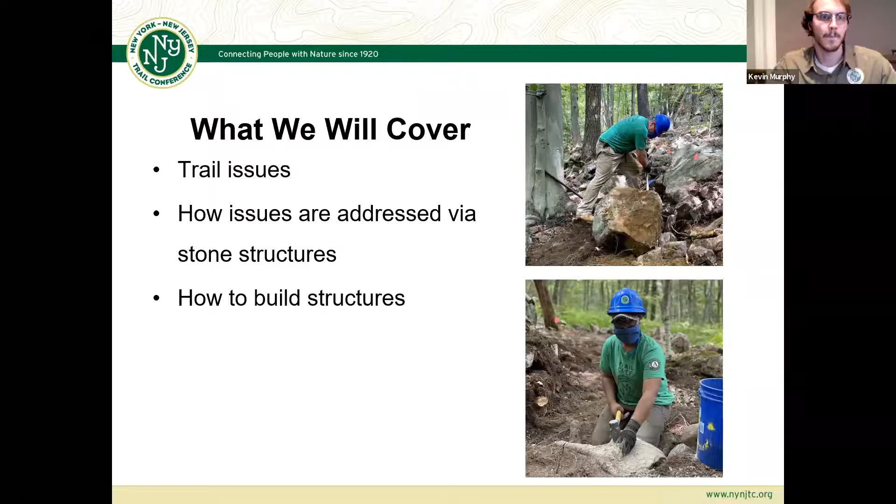So let's take a look—oh sorry, no. By a raise of hands, is everyone pretty familiar with the Trail Conference? We're all familiar with the history. I know I heard that some people are longtime volunteers here.

If you're not familiar, we were founded in 1920. It's almost our 100th birthday on the 19th. We're a volunteer-powered organization that currently maintains about 2,000 miles of trails. And here is where we work, our headquarters, the Darlington Schoolhouse in Mahwah, New Jersey.

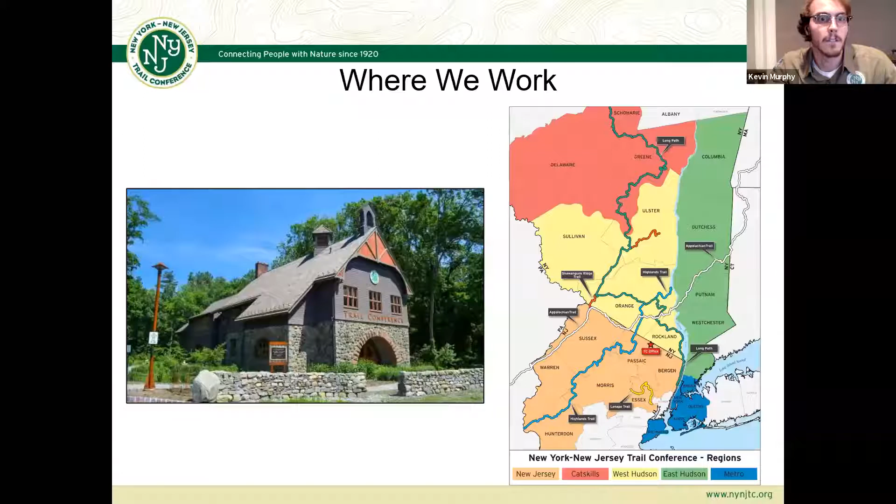Now let's take an overview of trail building and what the end goal is when laying out a trail. Trails should rely on the minimum trail building required to make the user's experience safe, navigable, and sustainable. However, even the best designed and maintained trails can suffer from issues requiring intervention, including the building of stone structures.

But first, let's look at these trail problems, these issues that we encounter. One is steep trail grades or steep slopes, which will accelerate erosion and make your trail unsustainable. Water management is a major issue—you have to accommodate for drainage and keep water off the trail and at the right speed.

Soft or unstable tread needs to be hardened. An example of soft tread would be muddy or wet areas. Unstable tread could be soil that needs to be retained.

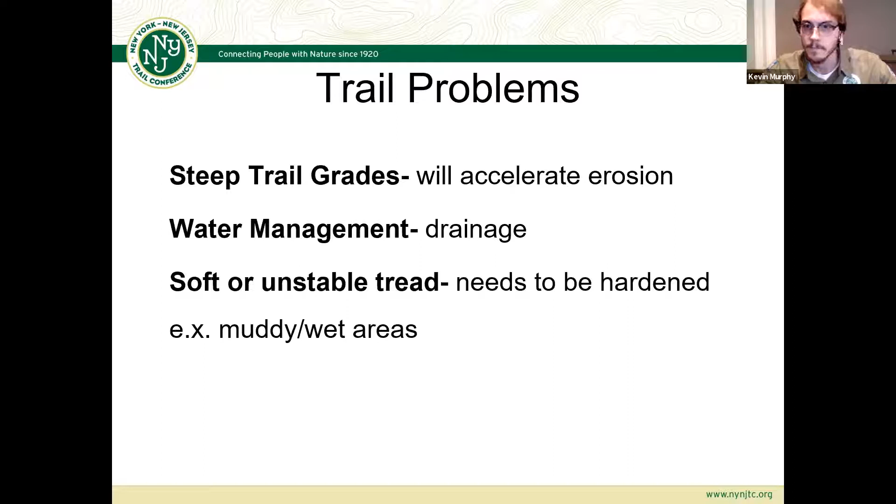So what can we do about these issues? There are really two options. We can either choose to reroute the trail to a different section of the land where we don't encounter these issues, or if rerouting is not an option, we can choose to regrade the tread. We can build drainage structures, sculpt the land somehow, and or address them through building structures, which we're going to look into today.

These trail problems we discussed can be solved with timber or wooden structures, but stone has advantages over timber, namely the cost of materials. Also, timber needs to be packed out to your site, which is time and energy consuming. And the lifespan of timber is not as great as stone, even if you're using rot-resistant woods like black locust or treated woods. It's not going to last as long as stone.

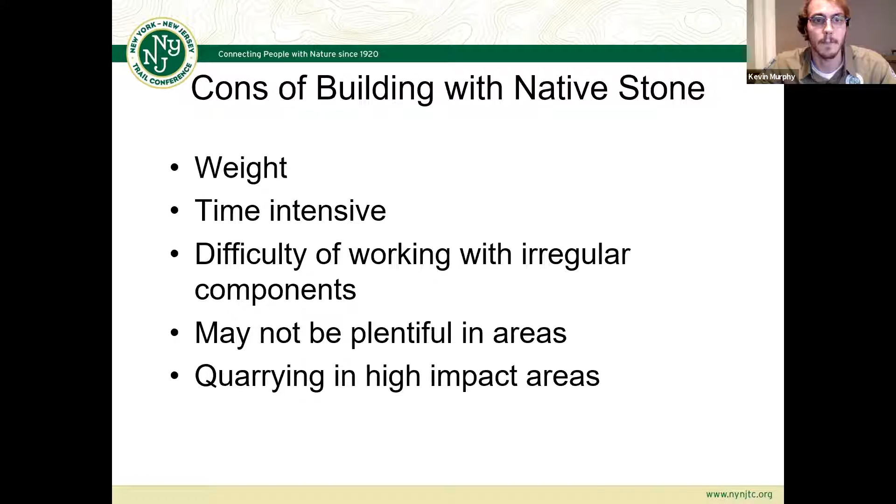So I'll let John now go into stone staircases. Yes, thank you. One of our most commonly used tread hardening structures is the stone staircase. Many of the trails that we work on traverse steep slopes, and that is why we choose to build staircases in these cases.

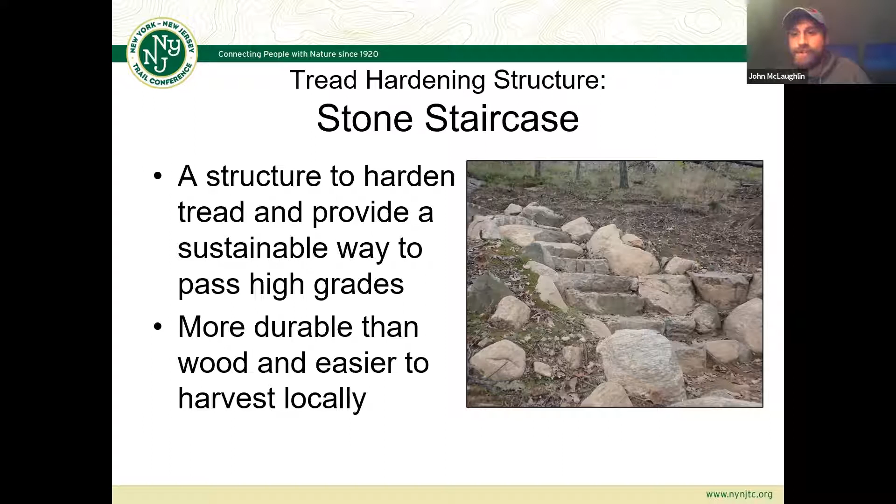Okay, so here's some of the different components of a staircase. I'd like to think there are four different components, one not shown here. So the first is step, the next is the base step, another is the gargoyle, and the last is crush. With the step: it should be about 6 to 8 inches tall, 11 to 18 inches long, and 18 inches or greater in width.

The base step is the first step that is placed and is covered by a few inches of mineral soil. The gargoyles are large rocks that are partially buried along the perimeter of the staircase. They help stabilize the structure and deter users from walking around the staircase. And lastly, the crush and fill are essentially rocks we have manually crushed, and they can be used as a base for all these components, or to fill in gaps between each different component.

I just want to add that the base step is there because it helps the structure keep its integrity, because when people go down the stairs, they usually put their full weight right as they come off. So the base step is there so that all that weight being applied, that compaction, is accounted for.

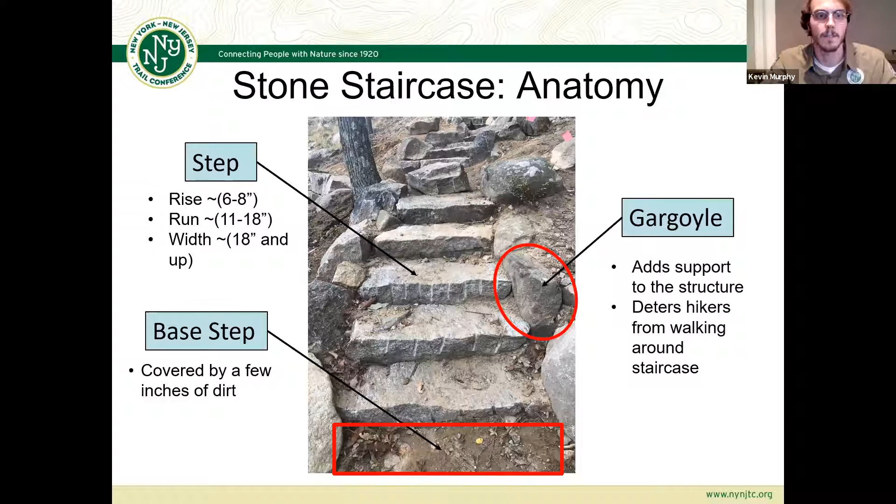Okay, so the staircase runway is another component of the staircase. It is a flat or slightly sloped patch of tread between steps. It's used as a break for hikers, or it's also used if the staircase is too steep for the slope. Gargoyles are also still required for this structure, as you can see in this image here.

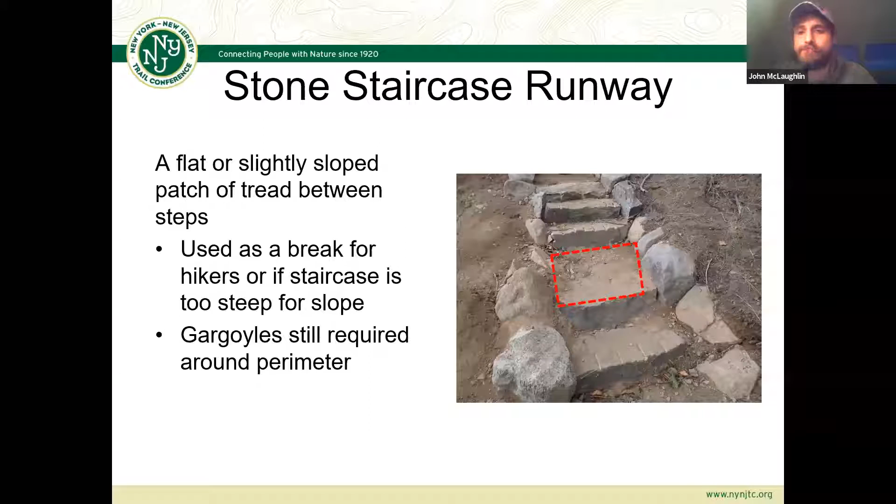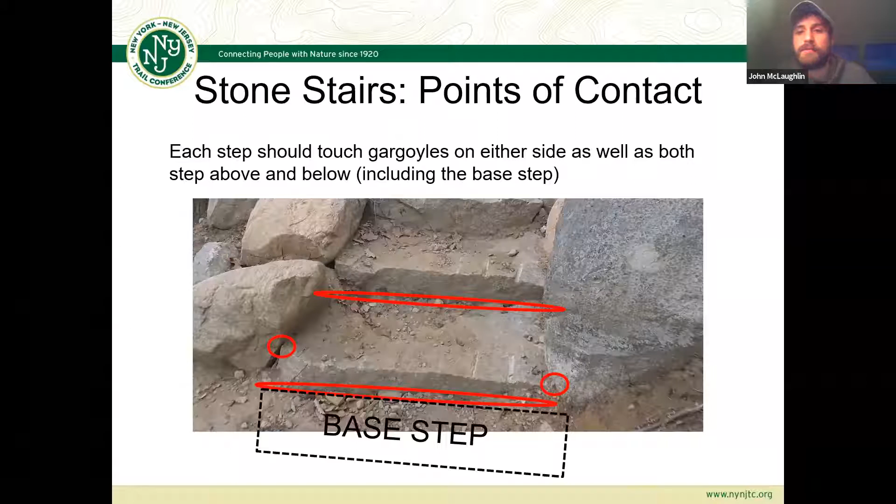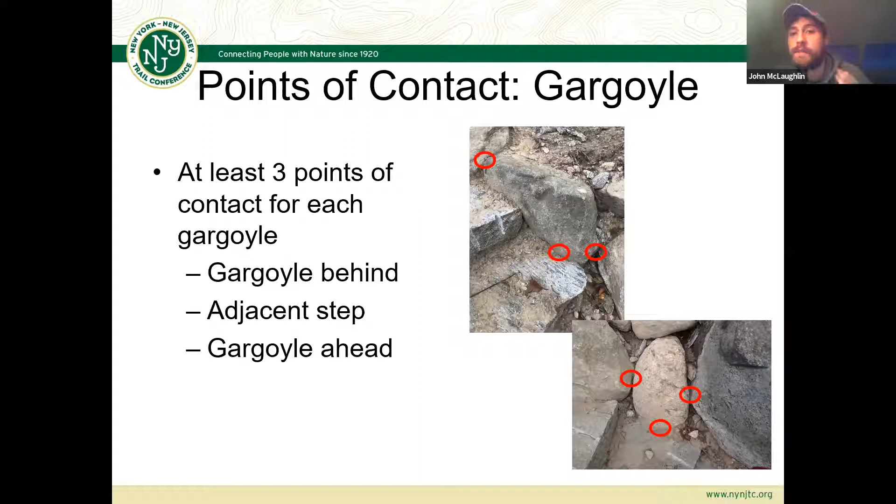Some important points of contact in terms of the gargoyle: at least 3 points of contact for each gargoyle, including the gargoyle behind it, the one ahead of it, and its adjacent step. In some cases, like the top left image, the gargoyle encompasses almost 2 steps, or even more, and it must have contact points with each step it encompasses.

Now that we've learned about the different components and anatomy of a stone staircase, let's look at how you actually plan a staircase out.

What you want to do is measure the elevation or rise over your distance. This tells you how many rocks you need to go X inches in distance and rise Y inches. I'll show you a diagram and the method using a 4-foot level and a measuring tape.

Here's a hand-drawn diagram I made. I used a 50-inch level because that's what we use in the field, but a 4-foot one is more common, and you can do it the same way. Start at the top of your slope, take your level, and measure the segments of rise and run for each part of the slope until you reach a flat part. For example, you might go 150 inches in distance and rise up 57 inches. Knowing that, and as John explained, we want a height of 6 to 8 inches on each step, which helps you break down how many rocks you need to go up 57 and over 150.

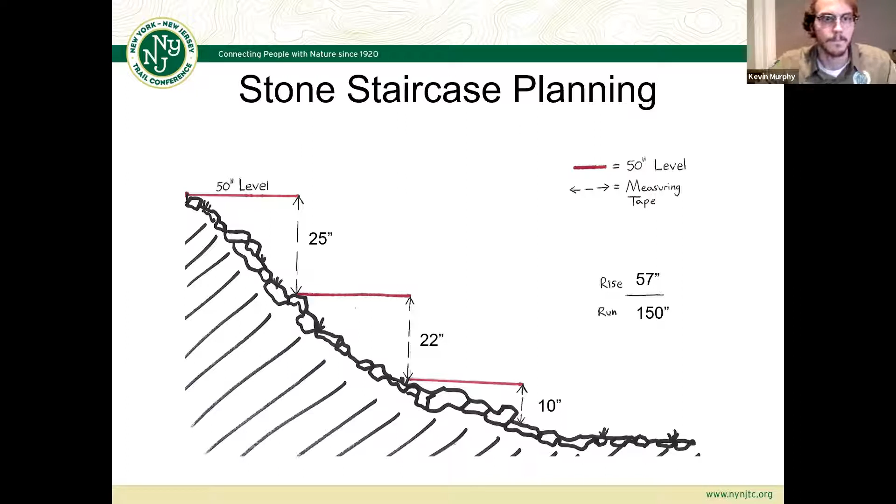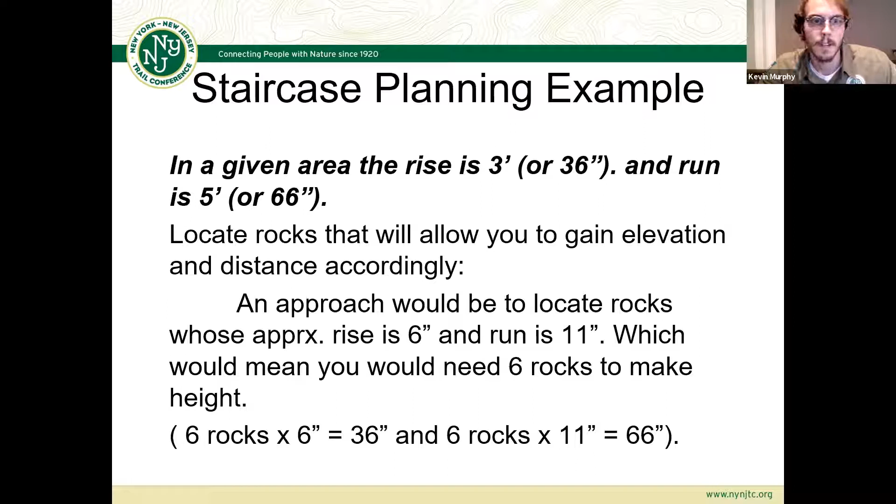Let's look at another example. In a given area, the rise is 3 feet and the run is 66 inches. We want to locate rocks that allow you to gain elevation and distance accordingly. You could locate rocks whose approximate rise is 6 inches and run is 11 inches, which would mean you only need 6 rocks to make height. That's a way you can break up how you plan your stairs and what approximate dimensions you're looking for.

I think my partner had to log out because he was having an echo issue. Let me see if I can admit him. You there, John? Give him a minute. Yeah, John? Okay, I will cover his slides. Let me make sure he's... I'm back, can you hear me? Yeah, I can hear you. Sorry, there was an echo, so that's why I tried to log back in. I'm not sure if it's gotten any better. Maybe not, I'll continue, I can hear you okay.

So, stepping stones. This is another tread hardening structure that provides a surface to traverse seasonally wet or muddy areas.

Hey John, I think you're still echoing. Okay, you want to just cover these slides? You could maybe try to turn down the volume on your speakers or something. Okay, I'll cover this slide right here.

Stepping stones are a structure used to harden the tread, providing a sturdy surface for people to traverse seasonally wet or muddy areas. Stones are arranged so that their flat faces are facing up, with about 8 inches left between stones. The stones are buried in organic soil so only a few inches are exposed on top.

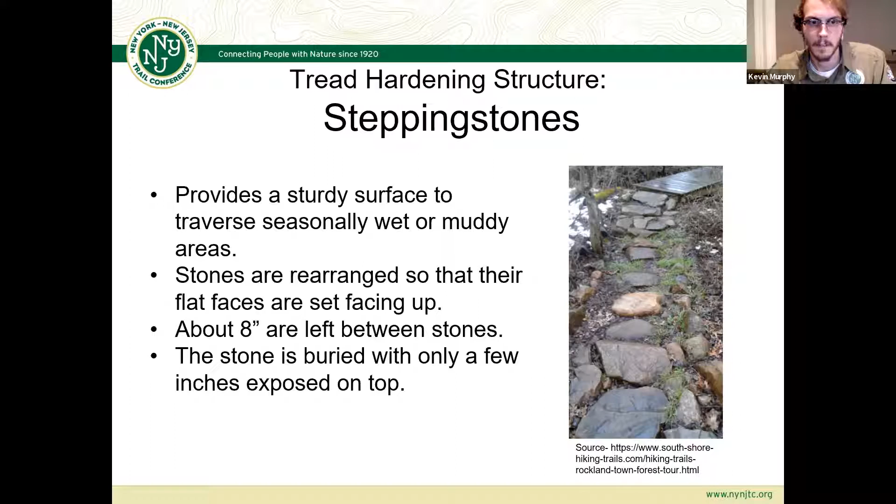You want to try this, John? I think he went out and is trying one more time to come back in. Okay, I'll do this one.

This is a structure used to construct tread called the stone turnpike. Its purpose is to slightly elevate portions of the tread over wet areas. You use it in areas with sitting water, and the benefits are that it makes the best path for hikers and sustains areas of conservation concern. It also works well for multi-use trails that have livestock and mountain bikers that can't step on individual stepping stones.

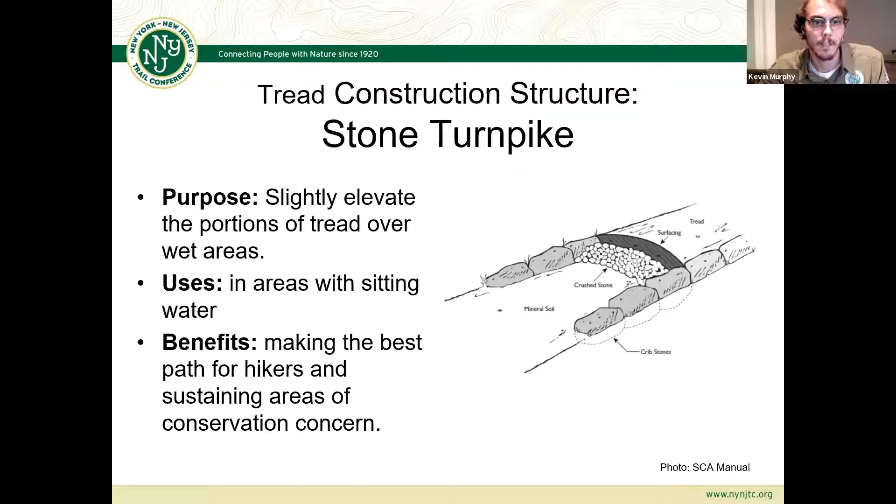Okay, you want me to try this now, Kevin? Is it echoing? I don't hear you echoing, but other people might. I'll try this.

So, the stone turnpike execution: rocks are arranged in 2 rows, marking the perimeter of the turnpike. Crushed rocks fill the space between the rows, and then this is all topped and packed with mineral soil.

Okay, so one of the drainage techniques that we use is a water bar. I will say as a disclaimer that water bars are not used as much as they used to be. Kevin will cover another technique after I'm finished with this called the culvert, and that's more commonly used today. But anyways, the water bar is used for a variety of drainage issues, to improve existing drainage patterns, divert snow melt and seepage, and rain from tread.

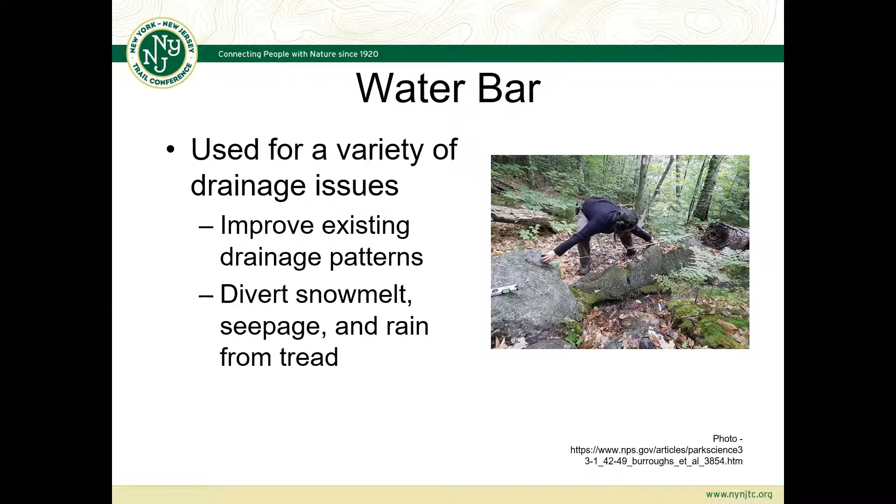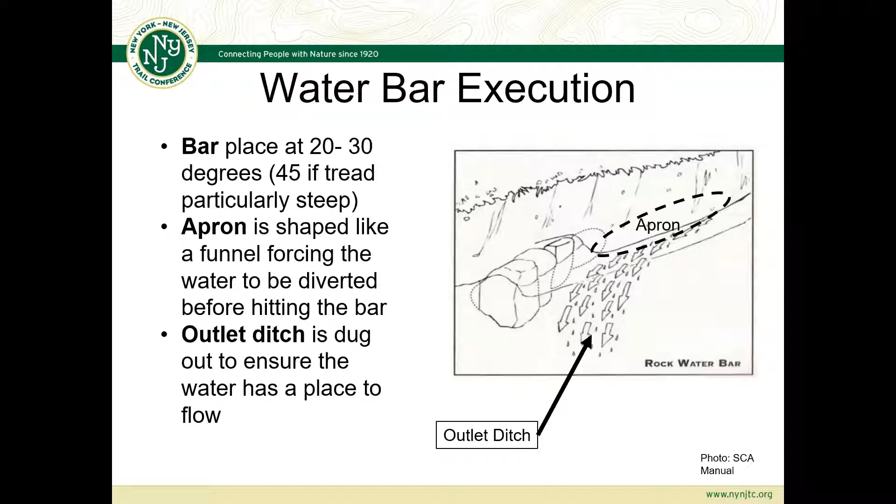So the execution of making a water bar, it can be made using either wood or rock, but rock is obviously preferred because of its durability. The bar is placed at a 20 to 30 degree angle on the trail, with an apron shaped like a funnel, forcing the water to be diverted before hitting the bar. And the outlet ditch is dug out to ensure the water has a place to flow.

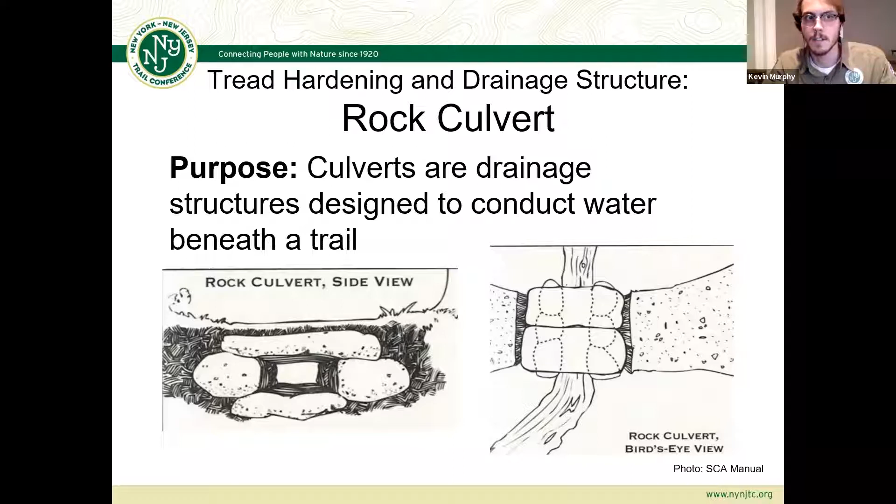Okay, so now I'm going to talk about a rock culvert. It's used to harden tread, and as a drainage structure it's kind of a multi-solution structure. Some people might be familiar with pipe culvert, you might see that in road construction, where there's a pipe underneath a road that allows water to go through. So a rock culvert is similar. They're drainage structures designed to conduct water beneath a trail.

Let's look at how to construct one now. First you want to dig out your area, excavate wherever you're going to be putting your culvert, and lay large flat stones in a trench to start the floor. On the sides, install large, well-matched stones, and you want to have them wide enough so you can get maybe a shovel spade in there, so maintainers can clear out debris, because that could cause your structure to fail, your drainage to get clogged.

And then to complete a culvert, you span the side rocks with a large flat stone, placed securely enough on top to withstand use. Remember that people walk over this. This is made to be an aesthetically pleasing drainage structure, so people can just walk over, they don't have to step over a water bar or something. And you can top it with soil or other earthen material to help keep it more structural.

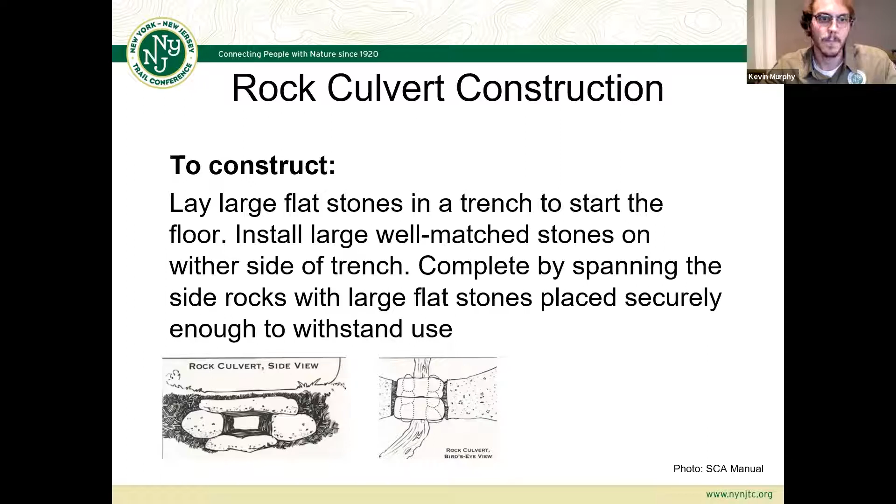Okay, so now let's talk about crib and retaining walls, which I mentioned before has been my specialty this season. Crib or retaining walls, you can use that word interchangeably, but they are a great problem solver. You can use crib walls to build up on steep slopes to create a new level trail surface behind them, or they can be built to retain a steep back slope just behind or above the trail from eroding onto the trail surface.

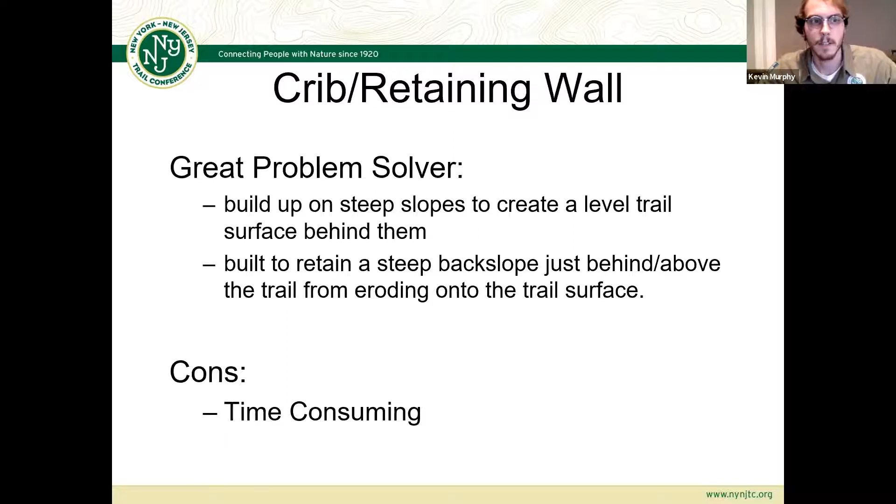However, they solve a lot of problems, but they're very time consuming. We try to mostly design a trail so that we don't have to build walls, because they take a lot of time and energy.

So most rock walls built on trails are dry walls. An advantage of drywall construction is that crews won't have to pack out cement and water to the site, but without mortar, gravity becomes the glue. So each stage of the drywall construction, from selecting large rocks to placing them with care, enhances the effectiveness of gravity and increases the sturdiness of the wall.

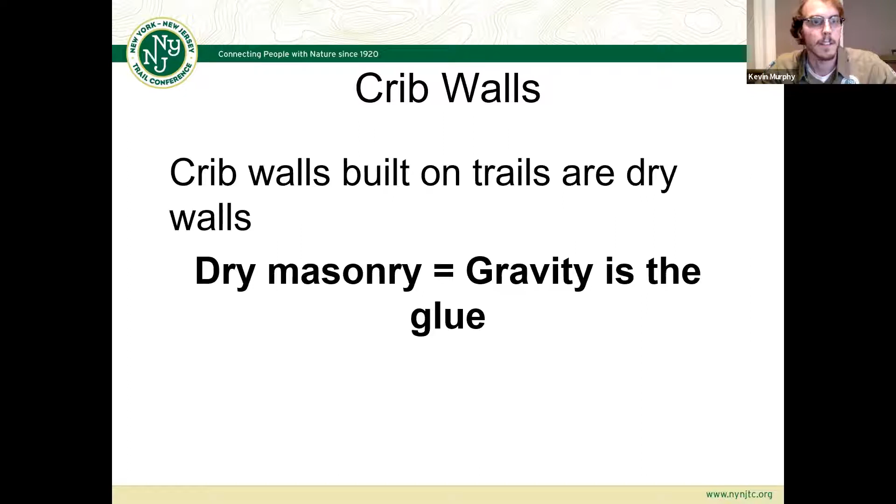It's preferred if you can get away with just using a single tier of large rocks, because if you get into multi-tiers, you have to worry about insloping your rocks, battering, and breaking joints, which we'll learn about. Also note that if your wall is 5 feet and up, that requires engineering.

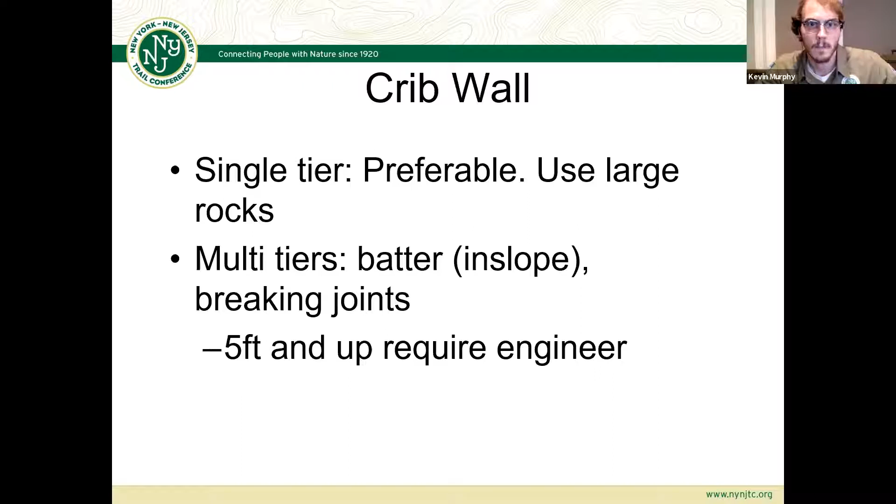So the first step of a multi-tier crib wall is to inslope your foundation, or this is known as battering your wall. First, you're going to excavate your batter, so dig down in the earth, and there's different ratios of how much you can lean if you really want to dive more into this. But basically, the main point with base tiers is using large rocks.

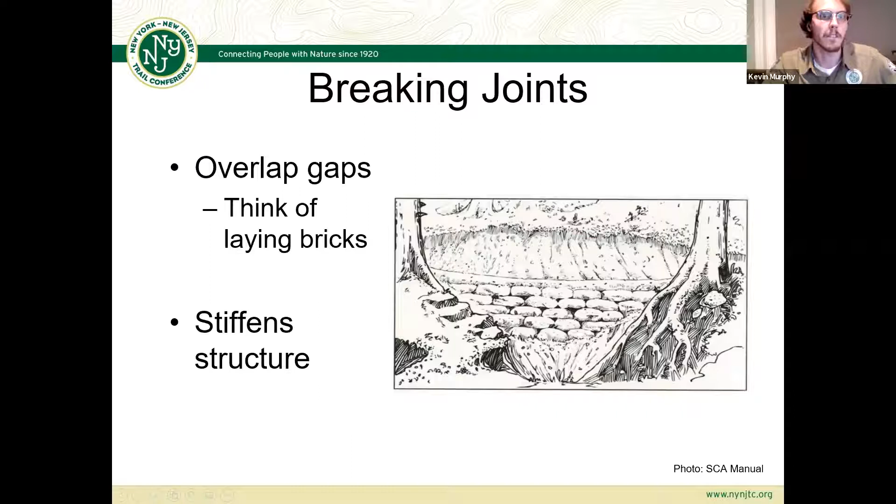So let's talk about breaking joints now. Breaking joints is the process of, let me go back, breaking these gaps. You can think of it like laying bricks, and here's a photo from the SCA manual that's very brick-like. You can see the joints, the gaps right here are broken by this rock, and vice versa. Breaking joints is going to stiffen your structure. Here's another example of a wall we built at Sterling.

And the last part of a crib wall: you got your base tier, you got all your middle stuff, and now you need your capstones. You want them to be very large because all that weight is going to hold the bottom tiers in place. And your capstones don't have to be flat on top.

That was something important I didn't mention in the previous slides: specifically with your foundation tier, you want the flat side to be on top, and your middle tiers you want them to be relatively flat. But when it comes to your capstones, they don't have to be flat on top. They can be protruding, or like a coping stone or something.

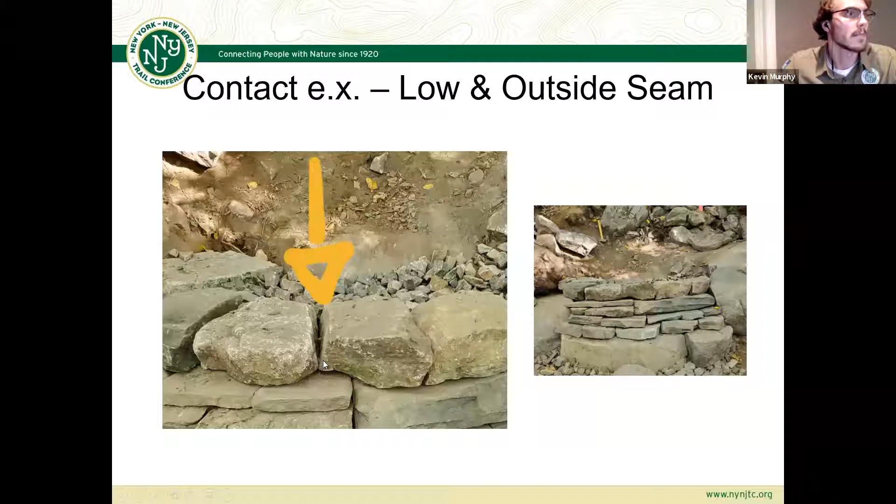Here's an example of a low and outside seam. This is the wall we just looked at before. This particular rock right here, we see it's outside, on the outside of the wall, but it's low and it's a seam. Not bad, but that's just an example.

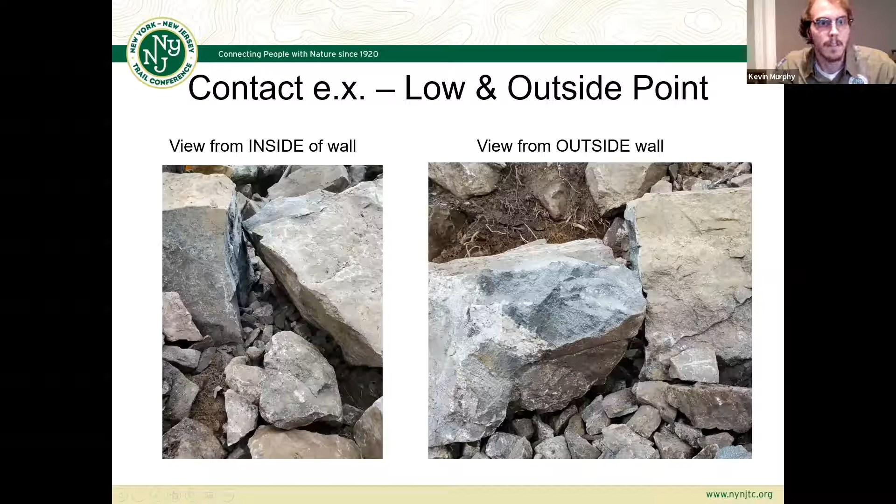There are some examples of different kinds of contact, and we have sort of a hierarchy of preferences. We prefer plane contact to seam contact, and seam contact to point contact. We want to strive for low and outside contact a lot. Most of the time, that'll make your structures strong.

So let's talk about when there are gaps in your wall or in your structures. You always want to backfill your gaps and never shim them. Here's an example of that same wall we looked at before, and this is the inside of the structure. To backfill this gap, we would put a rock on the inside to wedge it that way, as opposed to here's the front side of the wall. We would never want to push something in there because it'll just get pinched out, wedged out when the weight settles on top of the structure.

Now we can talk about some general overview of stone building practices that maybe we didn't cover in the structures we talked about. It's always good to quarry more stone than necessary. You don't want to leave yourself with no options, or get married to a rock that's just not going to work. You want to give yourself options. Also, it's nice to measure your rocks before you move them, since it saves time and energy, most importantly.

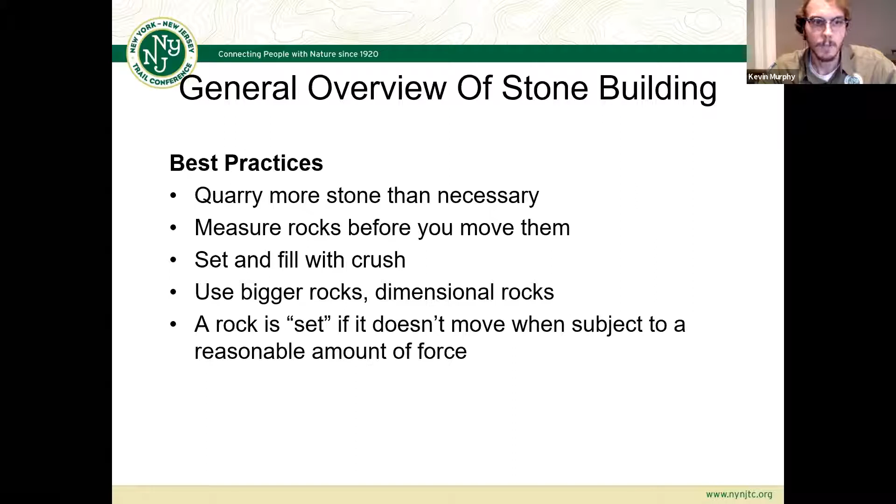Let's say it's a base tier and it's wiggling, so you can prop it up, lean it back, and prop it up from the back. But you never want to prop from the outside of the wall, because that can just fail.

It's time now to show what you learned. We're going to read off a situation, and you are going to recommend what type of structure we should build. You can answer either by putting it in the chat or raising your hand and saying it with your voice. So I'll read the situation.

There's muddy terrain where the trail goes through. The primary users of this trail are hikers, and there will be only foot traffic, no bikes or livestock, and there are many large boulders slightly off trail. What type of stone structure would you recommend? I'll give everyone a minute or two to answer or raise their hand.